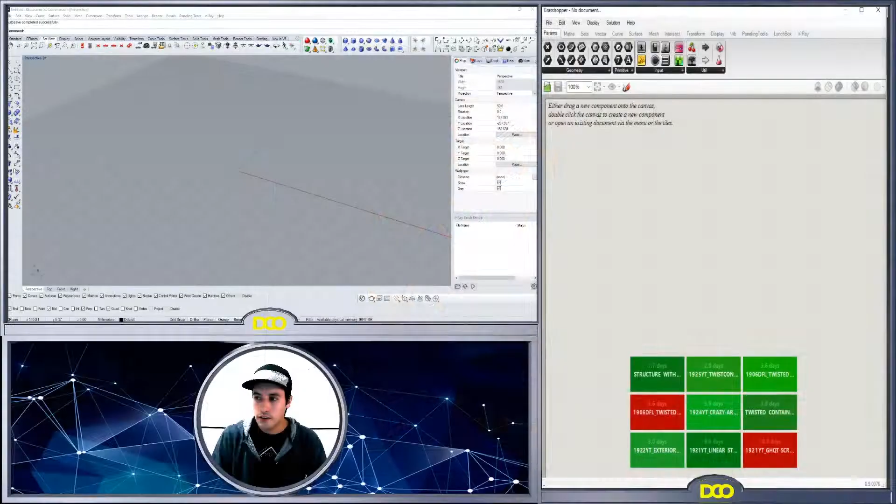Okay, so last night I came up with an interesting design that I want to share with you guys. I'm going to do it right now. I'm going to go into a time lapse, but if you do want to see all of the steps, make sure you let me know in the comments. So yeah, let me show you.

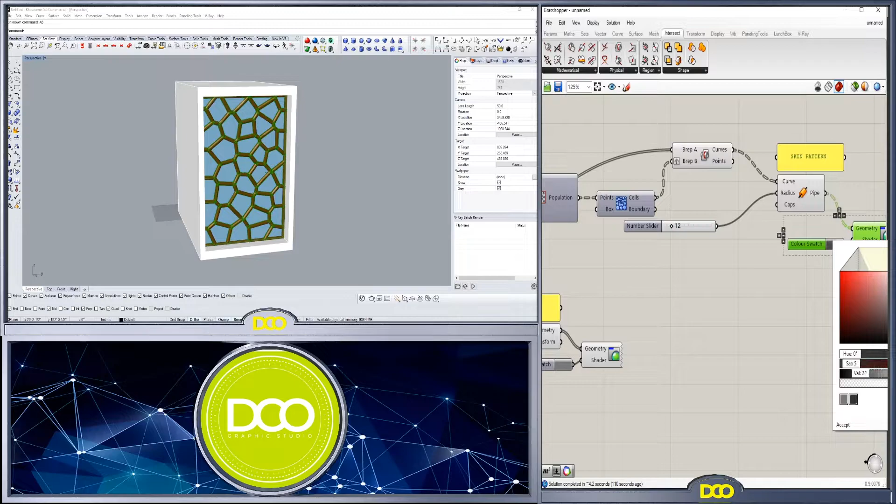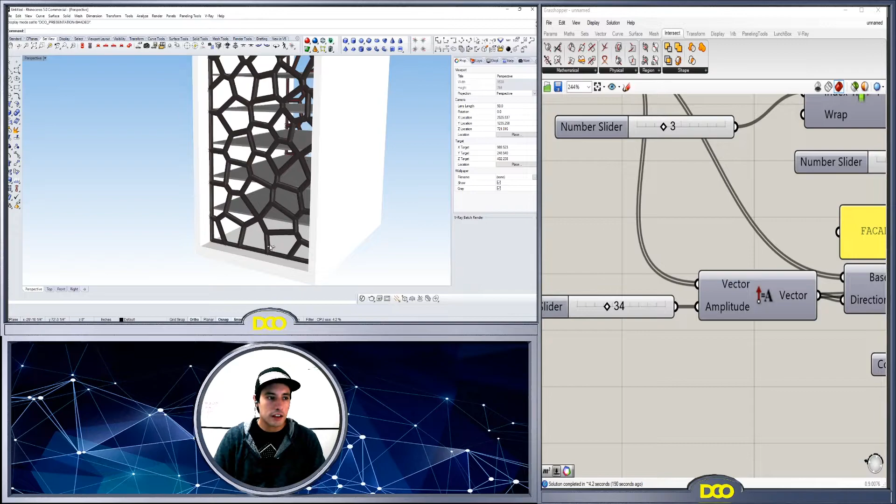Okay, so this is the result of this script that you see here on the right hand side. It's pretty straightforward. It's floors here where we can adjust the height, so we have here the height of the floors. We can adjust that, so I have it at 12. Then here the extrusion would be for the skin, so the glass facade here in the front is adjusted through this slider. It's a little bit heavy because it's doing all of these pipes at the same time that I'm moving the slider. So if I put 34 here, it'll actually create a 34-inch thick glass facade.

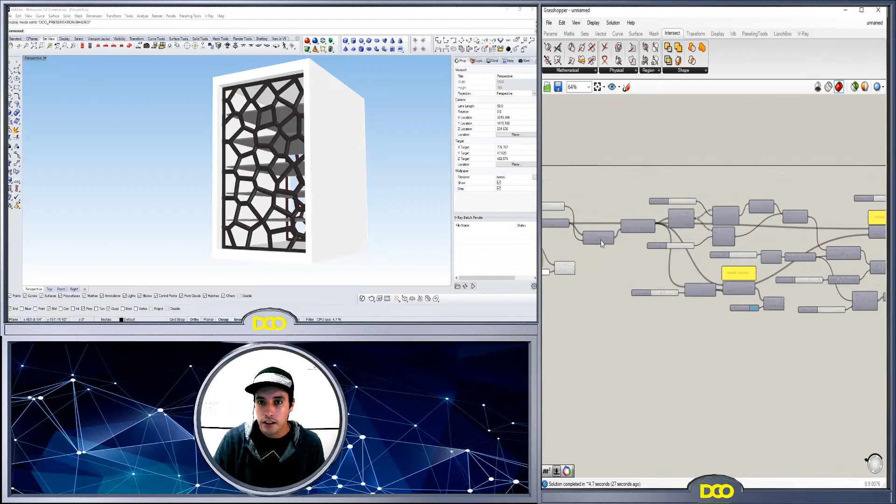So yeah, this is the script. I will add it to the description for you to download and play around with if this is what you want. But right now I'm going to bake it and do a quick render, and I'll show you guys what it looks like in the end. If you want to learn exactly how it works, I recommend going in here, downloading it, and seeing how things connect. It's pretty straightforward, but if you're having trouble with it, in my opinion, that would be one of the best ways to learn how to use the program—basically back engineering the work and then doing it yourself. So hopefully you learned something and enjoyed this tutorial.